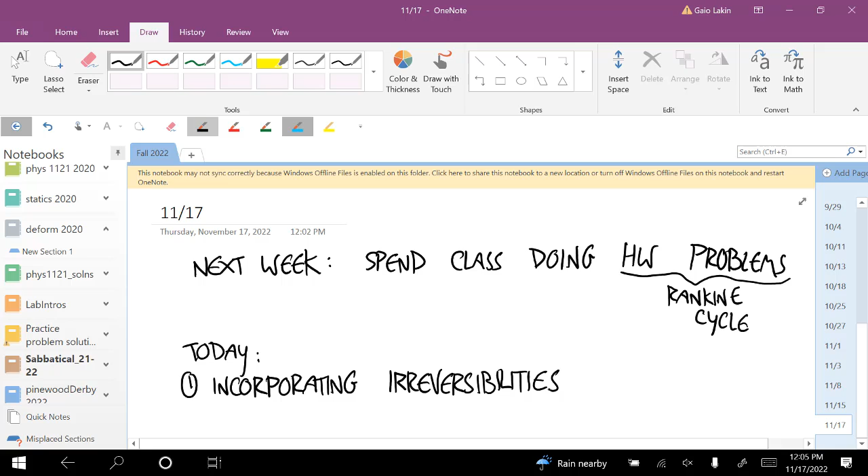Okay, so today we're going to talk about incorporating irreversibilities into the calculation, and then incorporating superheat and reheat. So the first one of these irreversibilities is just a way of getting more accurate, more realistic answers. And the second one is about power plant design, a couple of things that make power plants run more efficiently.

Okay, so first, irreversibilities. The two isentropic processes in the ideal cycle produce entropy in real life.

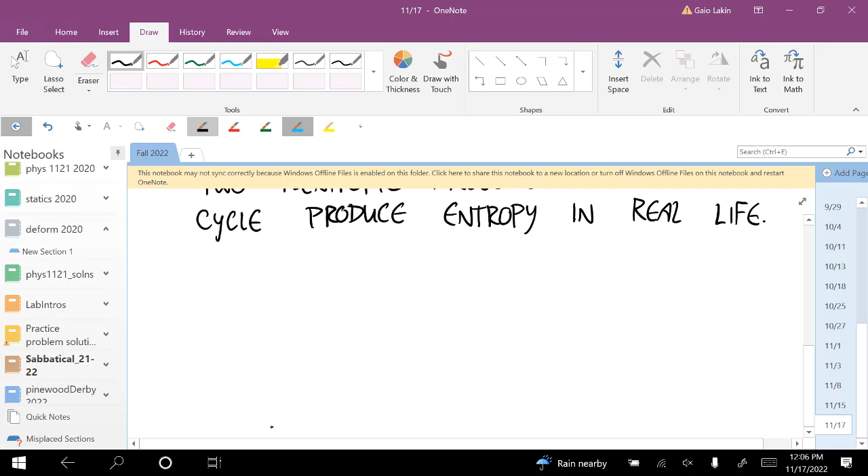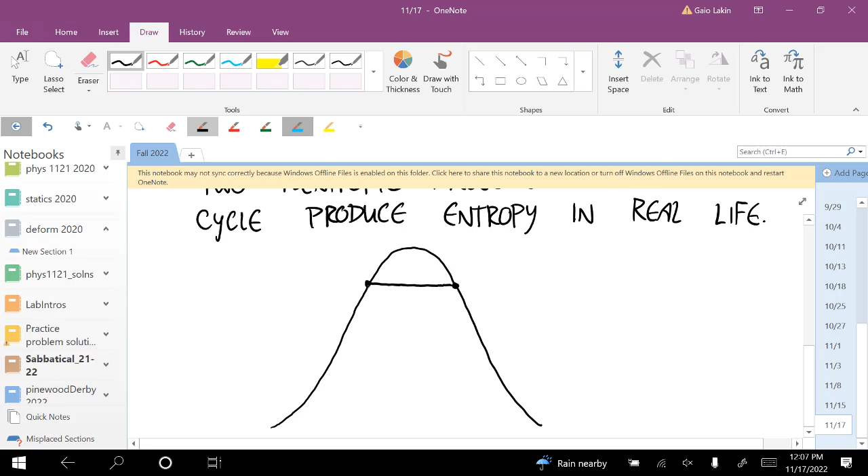So this is kind of what we're looking at. Here's a T-S diagram. So the ideal cycle that we've been dealing with looks like this. We have state 1 up here, and then it goes through the isentropic turbine. And then it goes through the condenser to state 3 - I'm leaving off state 2 for a second, I'll deal with that in a second. And then it goes through the isentropic pump - I'm going to leave that off for a second too. Okay, so that's the ideal cycle, that's what we've been doing so far.

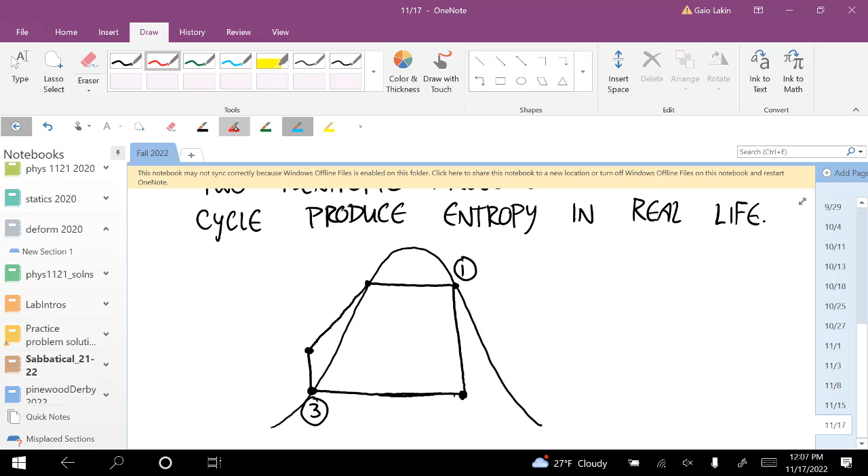In real life, what happens is this turbine process actually looks like this on the diagram. So this is state 2. You can see there's a small increase in entropy as you go through that turbine. What was our state 2 in the ideal cycle, now we're going to call it state 2s, for constant entropy.

And going through the pump, that's the other process we've been assuming is isentropic. Instead of that being an isentropic process like this, it produces again a little bit of entropy, so this is the true state 4. This black one that's been our state 4 up until now, I'm going to call state 4s. So you can see where that entropy comes into those two processes, because the horizontal axis is entropy, so you can see that each of those two processes increases entropy a little bit.

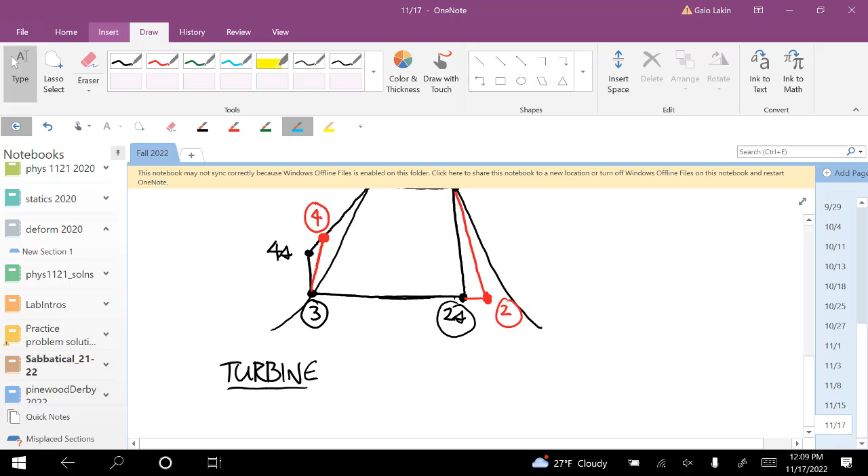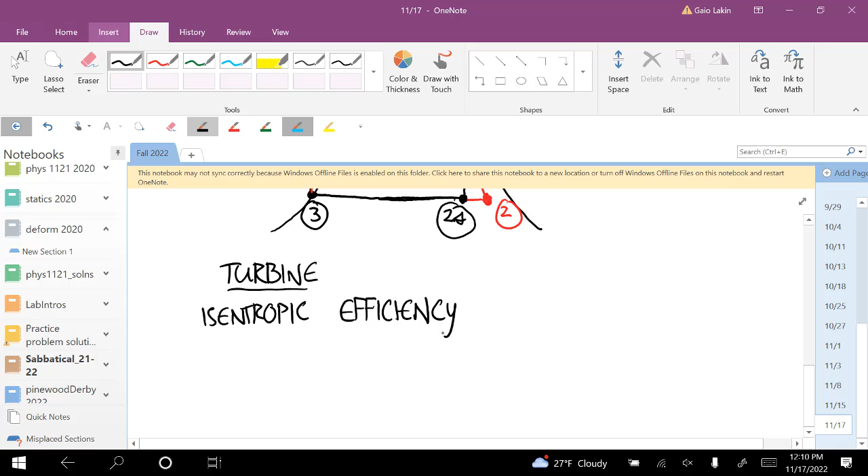And the way this is represented mathematically is called isentropic efficiency. So I'm going to go through the turbine first and then go through the pump. For the turbine, the isentropic efficiency, I'm going to call it eta sub t, and it's equal to the work rate for the turbine divided by the work rate for the turbine assuming isentropic. Which, of course, we've used this mathematical trick a lot since we've represented everything in terms of the work rate per mass flow rate. You can also write this as the ratio of the work rates per mass flow rate for these two things.

And now we have expressions for both of these two. So we can write this as the enthalpy at state 1 minus enthalpy at state 2, divided by enthalpy at state 1 minus enthalpy at state 2s.

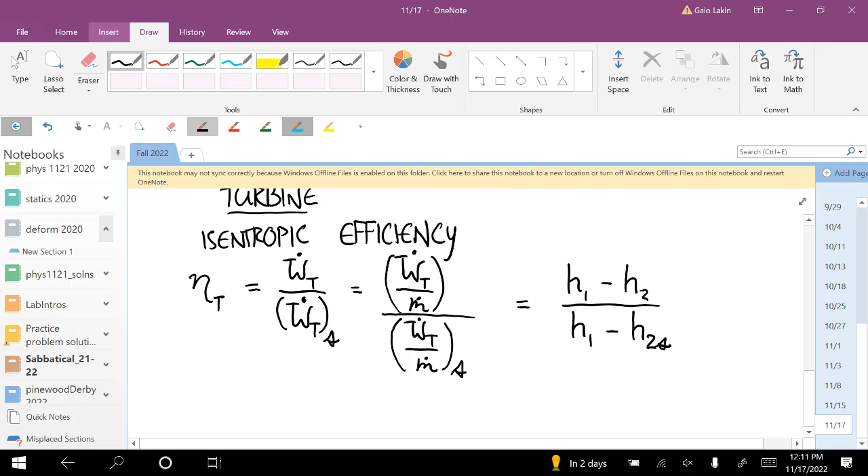So if you're given a fraction or percentage of that isentropic efficiency, you can rewrite this equation as H2: the true H2 is equal to H1 plus the isentropic efficiency times the quantity H2s minus H1.

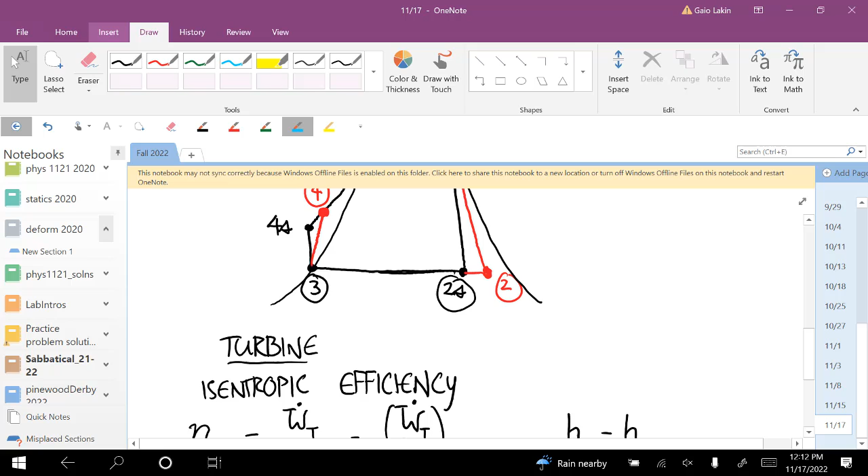So the idea here is, say you're given that this turbine has an isentropic efficiency of 90%. You can do the calculations for the ideal Rankine cycle, then do this correction to find the enthalpy at state 2. That enthalpy is what you'd use to calculate the thermal efficiency of the whole cycle.

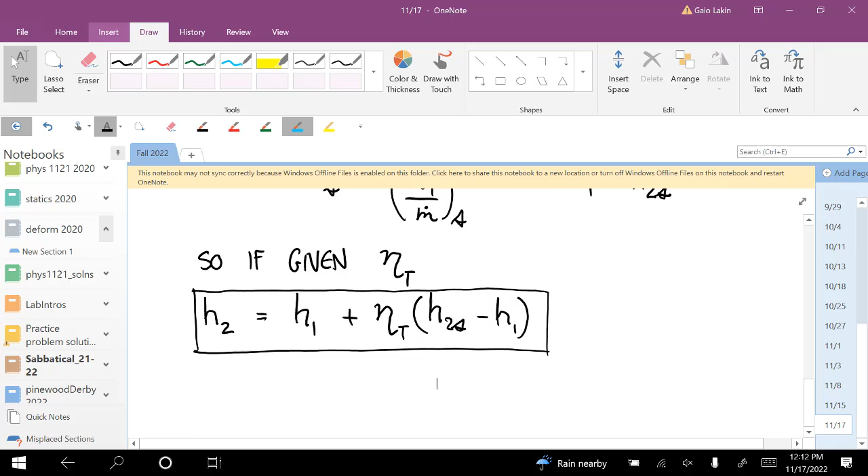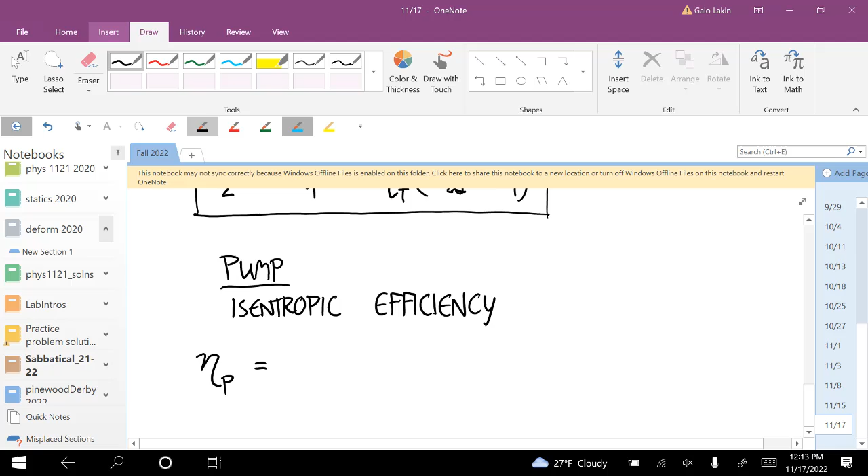And it's similar for the pump, so the isentropic efficiency of the pump, eta sub p. Notice this is fundamentally different than the turbine, because turbine work is what we're getting out, pump work is what we're putting in, and so that reciprocalizes the fraction for the efficiency.

So we have W dot for the pump, for the ideal case, divided by W dot for the pump in the true case. That's switched from what it was before. And you can write these as ratios of the mass flow rate.

Now that we have it this way, we can write it in terms of the enthalpies. So you have H4 for the ideal case minus H3, divided by H4 actual minus H3.

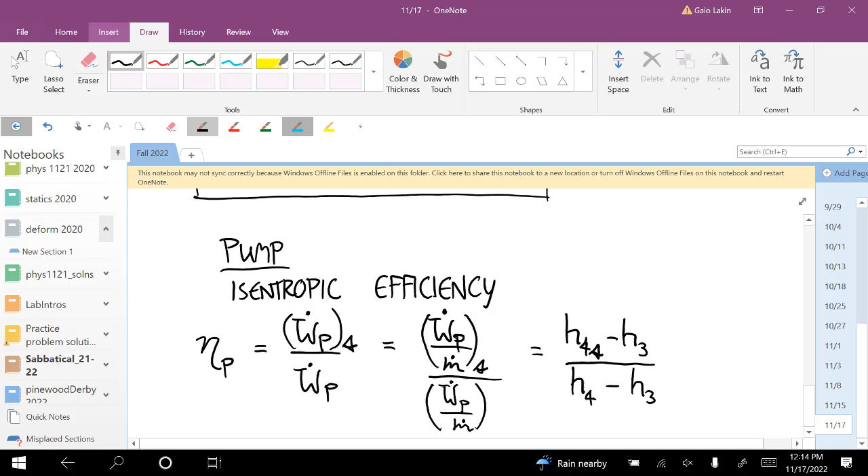One other thing: remember we can also write these for the pump because we're assuming this is liquid and incompressible. We can write this as V3 times the quantity P4S minus P3 — that's the other way to calculate that rate — divided by, well, the V3s are the same, real and ideal, so V3 divided by V3 times the quantity P4 actual minus P3.

Those V's cancel, so you can also write this isentropic efficiency as the ratio of P4S minus P3 divided by P4 minus P3. The S's are the ideal case, what we've dealt with up until now, and the non-S's are the actual case with entropy in these processes.

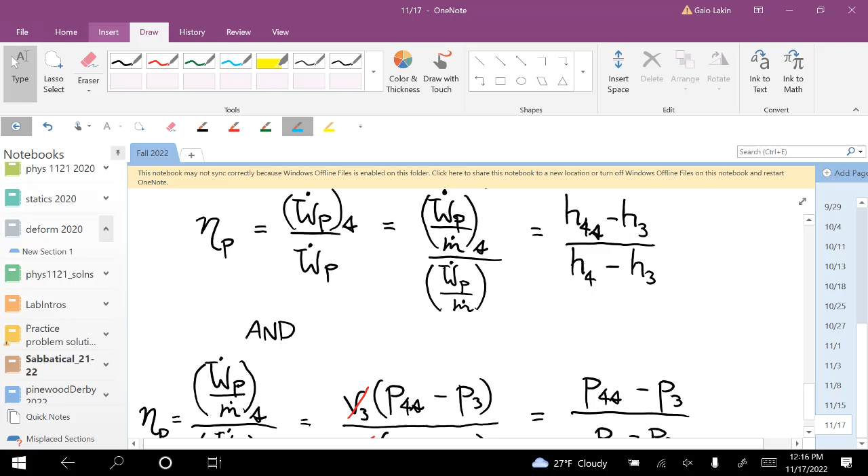So now we can rearrange, just like we did with the turbine, to find the new true states at state 4.

So if you know eta for the pump, then you can calculate H4 is equal to 1 over eta pump times the quantity H4S minus H3, plus H3.

Or alternatively, using that incompressible assumption, P4 is equal to 1 over eta P times the quantity P4S minus P3, plus P3.

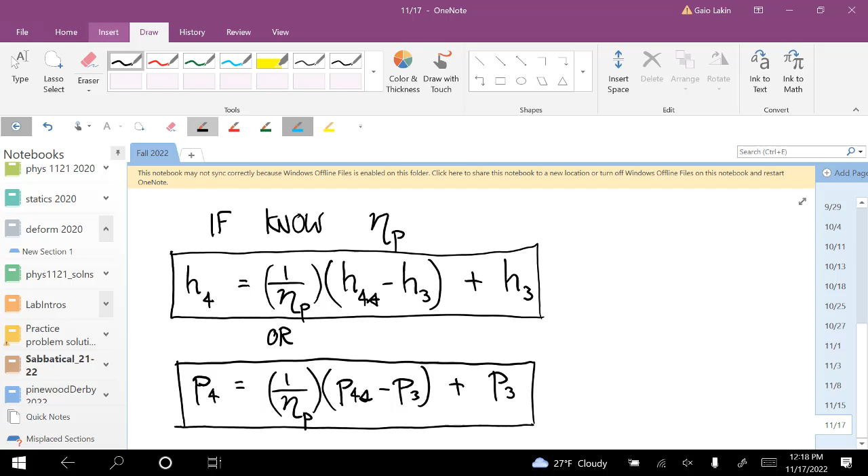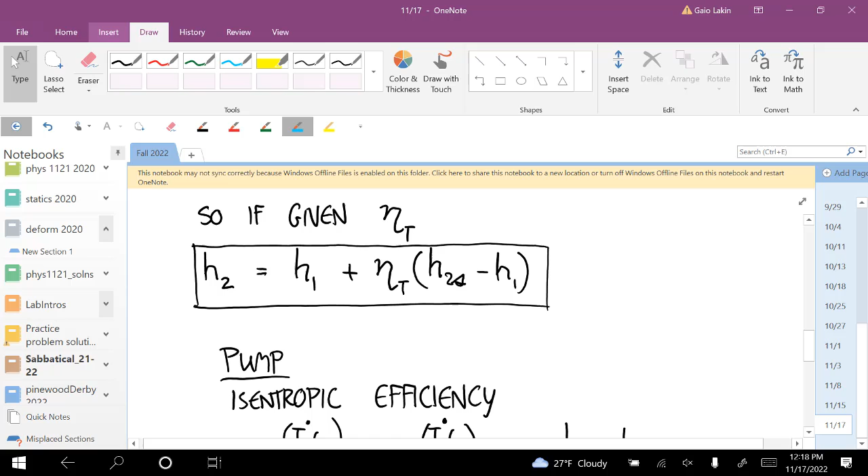So the basic idea is, if somebody has measured those isentropic efficiencies, you can do all your calculations for the ideal case like we've already done, then apply these correction equations to find the true states after the pump and the turbine, and plug those into the total efficiency equations.

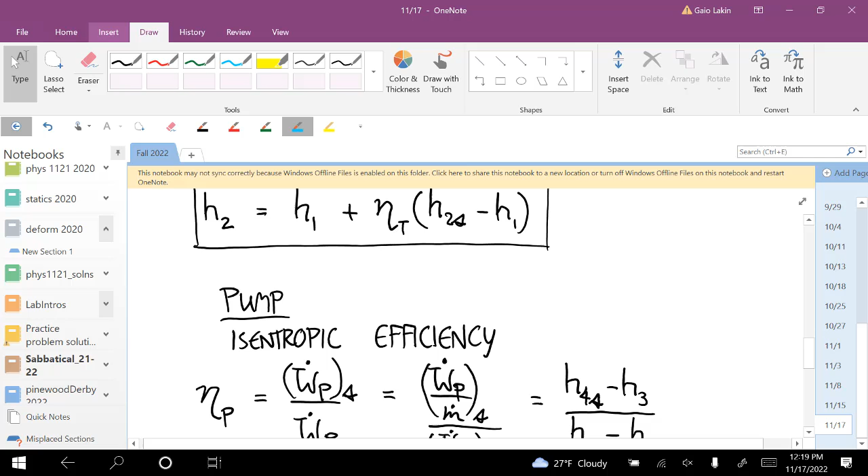So let's go back now to this same example from last time. Remember that last time we assumed this was an ideal cycle, so all our answers were for an ideal cycle. I'm going to use the calculations we did last time to be now our S states — you with me on that? Because we were doing the ideal case.

So now that's our 2S and our 4S. State 2 from Tuesday is now our state 2S, and our state 4 from Tuesday is now our state 4S.

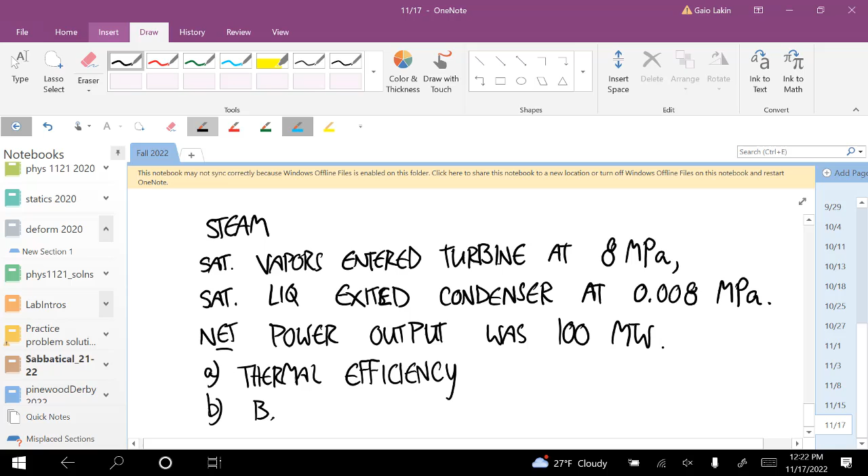And we calculated the thermal efficiency, the back work ratio, the mass flow rate, the rate of heat transfer in at the boiler, and the rate of heat transfer out at the condenser. Then we did the thing with the cooling water — I'm not going to do that again because the condenser isn't affected by this at all. This only deals with the two isentropic processes.

So calculate these again, assuming isentropic efficiencies at the turbine and the pump that are the same and equal to 0.85.

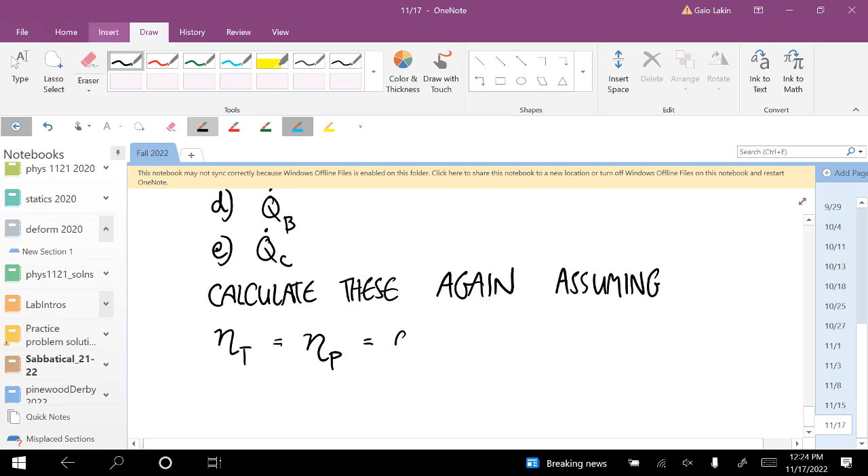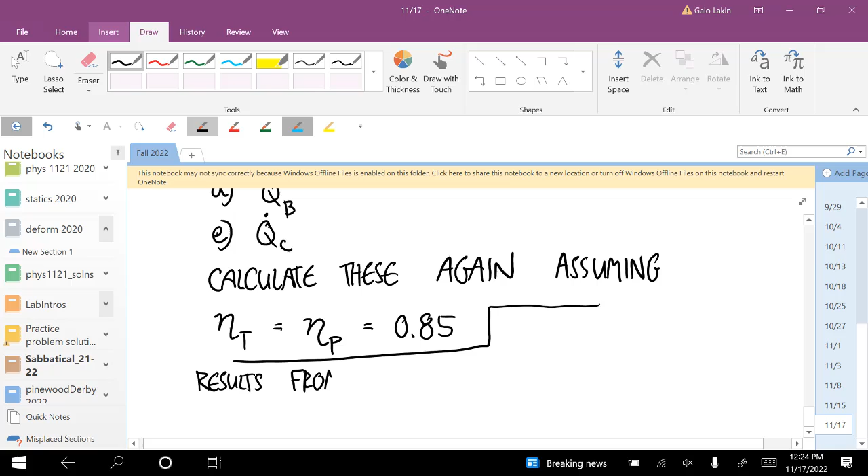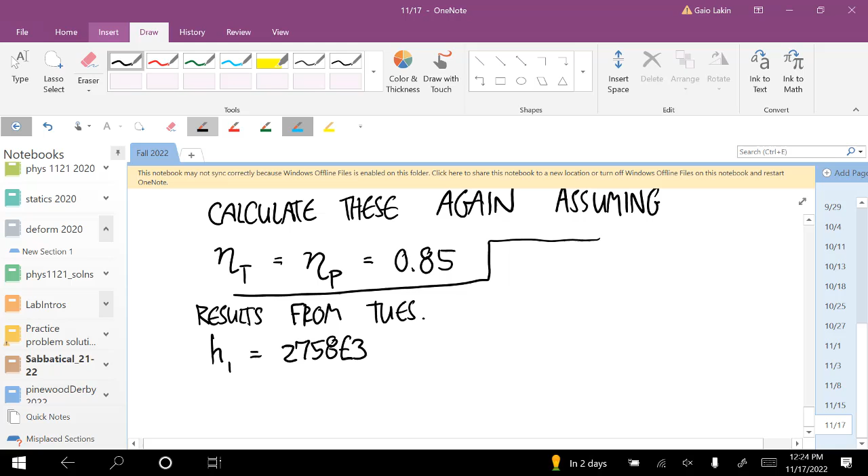Okay, when we did this problem before, we got — let me summarize our results from Tuesday. The enthalpy at state 1 was 2758 times 10 to the third. The enthalpy at state 2 that we found, now our 2s, is 1795 times 10 to the third.

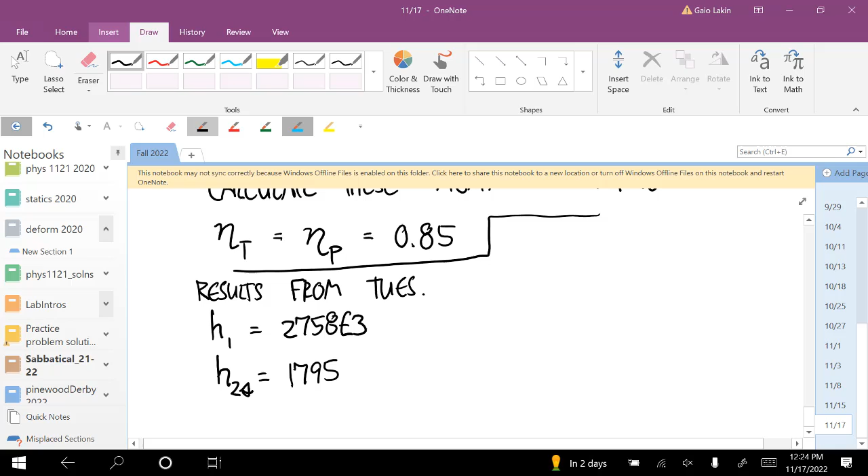H3 coming out of the condenser was 173.88 times 10 to the third. And H4, now our 4s, was 181.87 times 10 to the third.

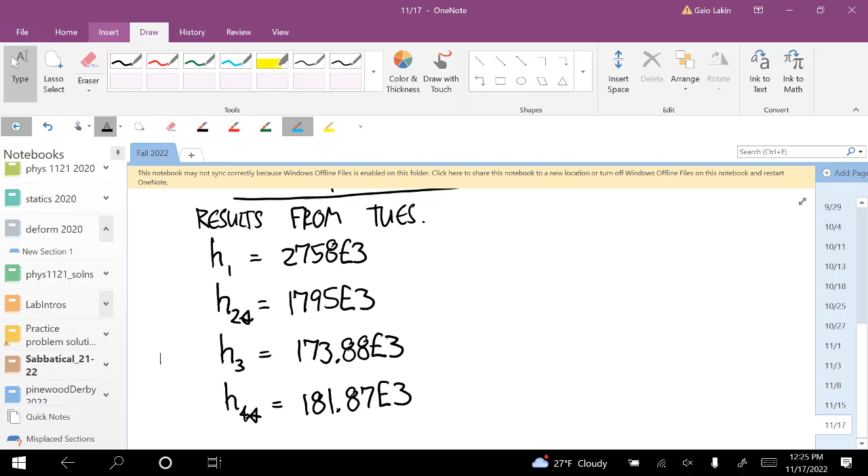And what we got — this is now what we're going to compare. We calculated — oh, did I not write these down? Any of you have your notes from last time? I guess I have mine right here. Let's see, so what we got was — oh, I do have it, right here. So what we got last time was a thermal efficiency — is that what it was? 0.371, yeah.

So we got a thermal efficiency of 0.371. We got a back work ratio of, what was that? 8.31 times 10 to the minus third.

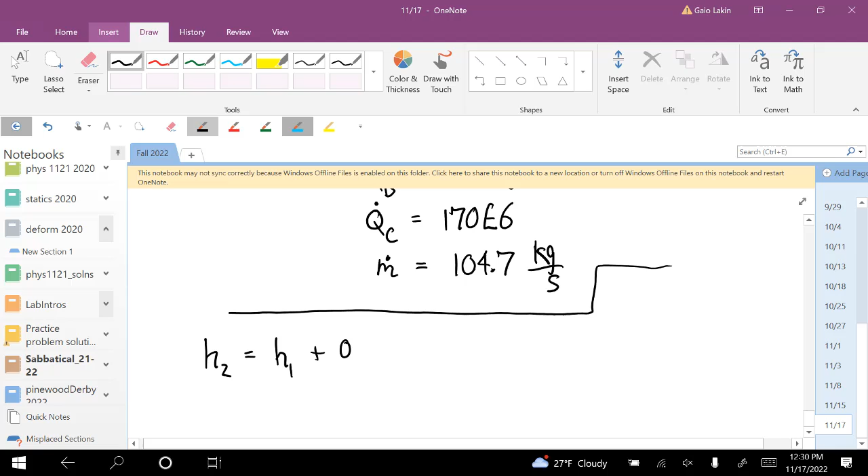Okay, so first we can calculate H2. So H2 is equal to H1 plus 0.85 times the quantity H2S minus H1. And so that's equal to 2758 times 10 to the third plus 0.85 times the quantity 1795 times 10 to the third minus 2758 times 10 to the third. And you get an H2...

I got 1939.45 times 10 to the third. Is that what you got? Yeah.

And we can do the same thing for H4. So H4 is H3 plus 1 over 0.85 times the quantity H4S minus H3. And so H4 is 173.88 plus 1 over 0.85 times the quantity 181.87 times 10 to the third minus 173.88 times 10 to the third.

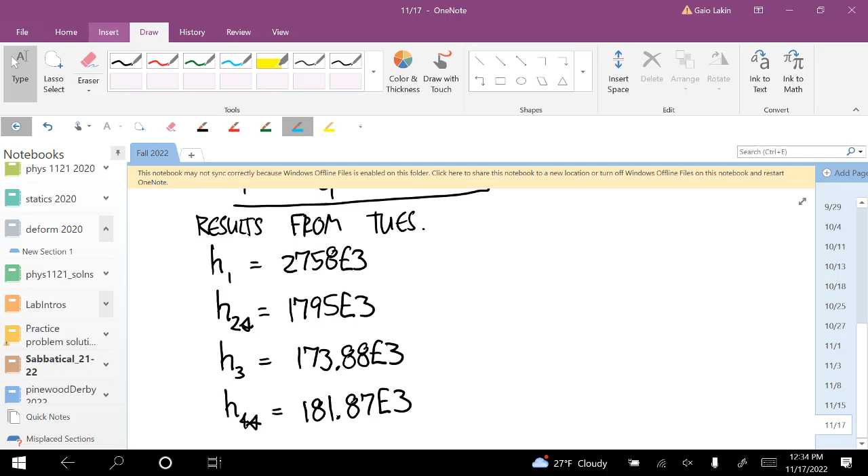So that's 1 minus 1939.45 - I'm going to leave off the 10 to the thirds because it's just a ratio here - minus H3, 173.88, divided by 2758 minus 183.28. And you get 0.314.

So you start with the same boiler temperatures and everything. The condenser and boiler work exactly the same as they did before, but you have those efficiency losses in the pump and the turbine, and it decreases your thermal efficiency from 0.37 to 0.31.

Wait, just to reiterate then, so the eta P and eta T are just referring to the processes done by the pump and the turbine, and then this eta is the entire cycle? This eta is the entire cycle, yep. And the other two are just for the two isentropic parts, which is the turbine and the pump. Yeah, which, well, were isentropic, but in this case. Correct. Oh, yes, right.

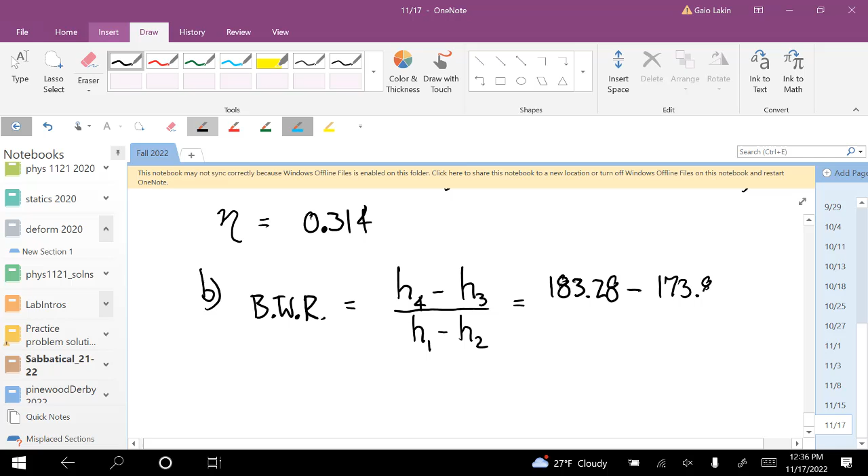And so that's 183.28 minus 173.88 divided by 2758 minus our new H2, which is 1939.45. And so the back work ratio is 1.15 times 10 to the minus second.

So these first two went the way we all expected them to. You have less efficiency, so you have less total thermal efficiency, and the pump is using up more of the power, a bigger chunk of the power than you were before, of the power that you get out of the turbine.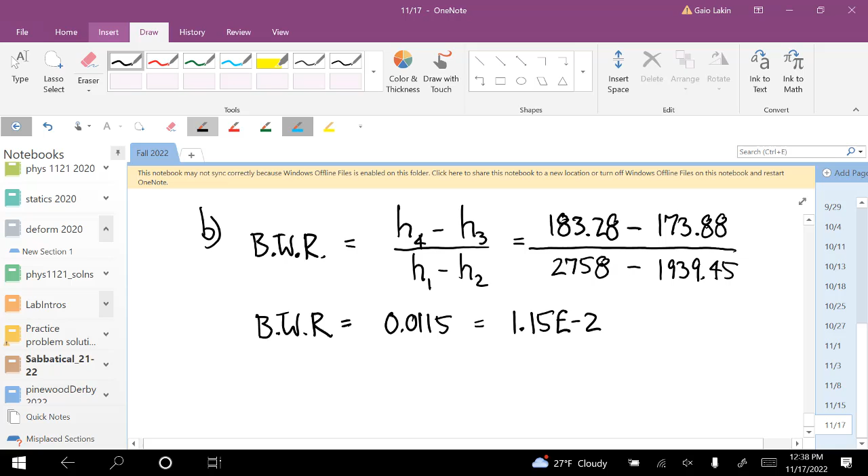Mass flow rate. Well, we know that 100 times 10 to the 6 is the work rate at the turbine minus the work rate at the pump. And so that's equal to the mass flow rate times the quantity H1 minus H2, because that's the rate of work produced at the turbine divided by the mass flow rate, and then minus the expression for the pump, so minus H4 plus H3.

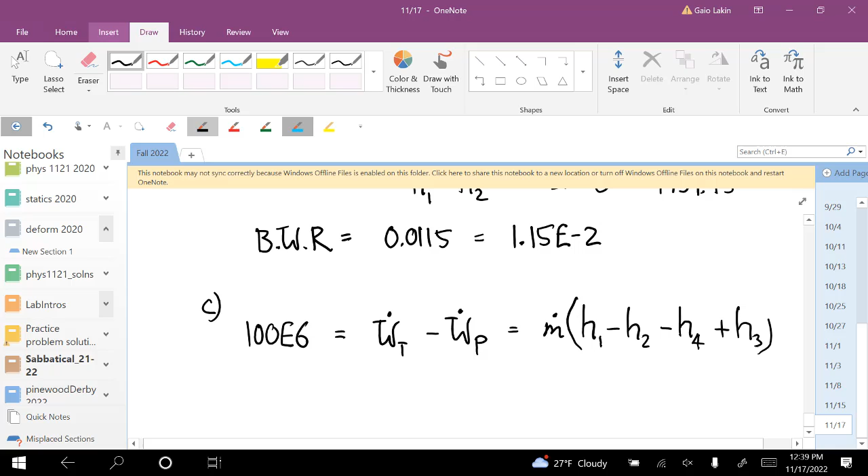So the mass flow rate is 100 times 10 to the 6, divided by the quantity H1 minus H2 minus H4. So 2758 times 10 to the third, minus 1939, minus 183, plus H3, 174. Oh, and these are all times 10 to the third. And so the mass flow rate is 123.5, about kilograms per second.

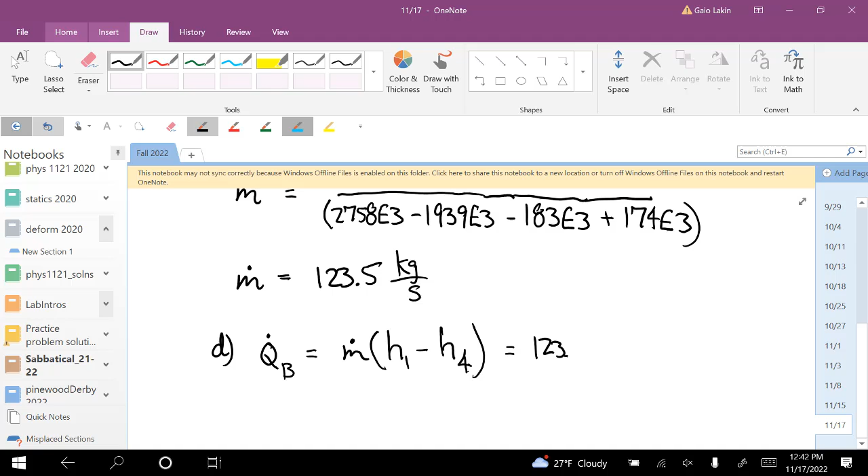And then, well, now these last two are pretty quick. The heat coming in at the boiler is the mass flow rate times the quantity H1 minus H4. So that's 123.5 times the quantity 2758 times 10 to the third, minus 183 times 10 to the third, and we get 318 megawatts. For the ideal case, we had 270. So you need more heat coming in at the boiler.

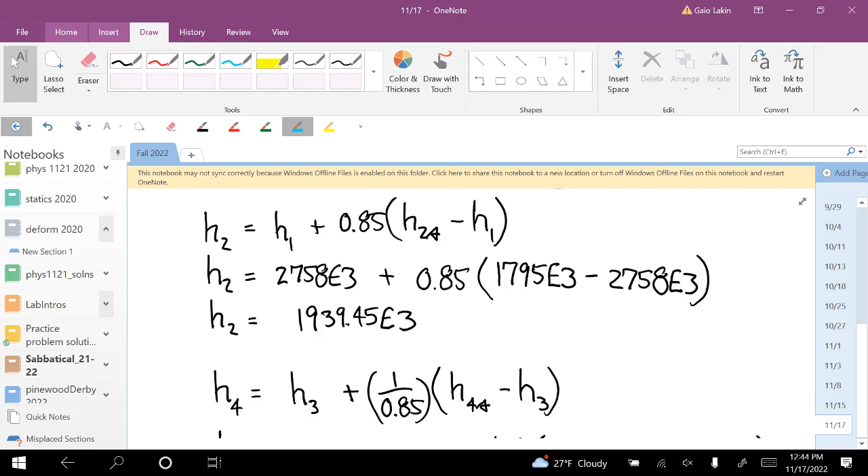And then at the condenser, the last one, the heat out at the condenser is equal to the mass flow rate times the quantity H2 minus H3. So that's 123.5 times 1939 times 10 to the third, minus 174 times 10 to the third, and we get 218 megawatts.

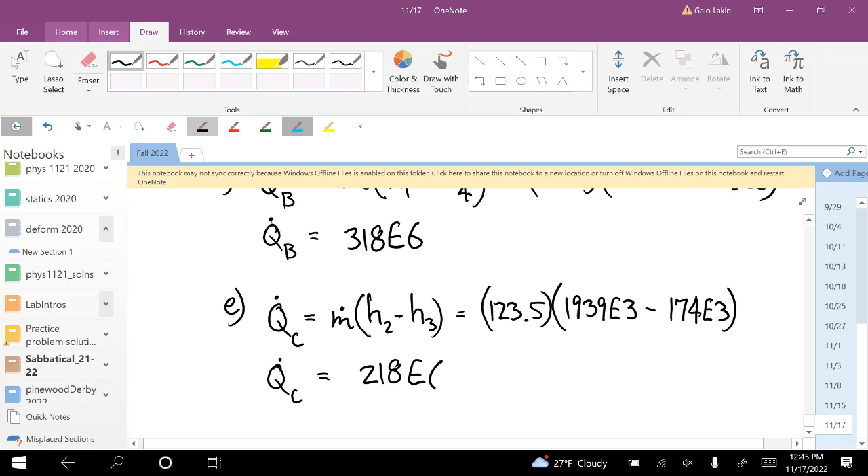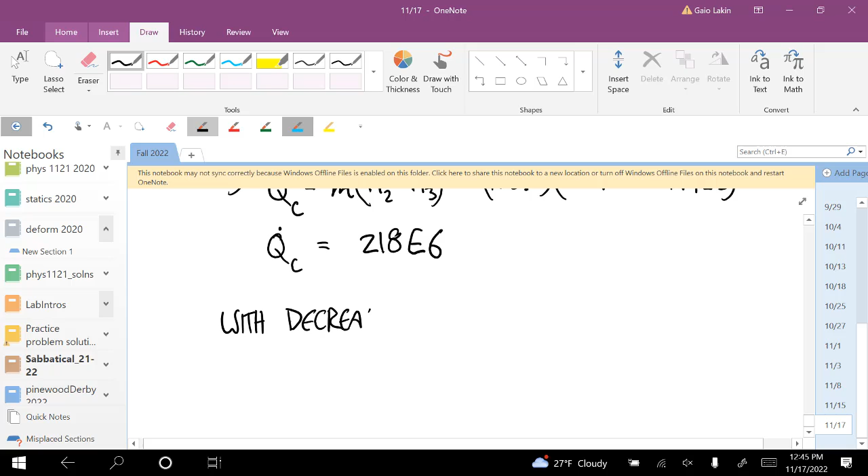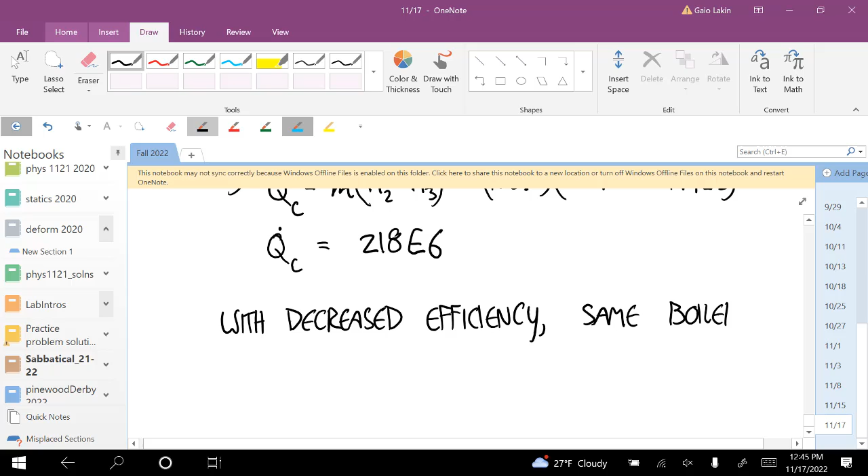Okay, so with decreased efficiency, and with the same boiler and condenser states, for the same net power, our thermal efficiency was down, our back work ratio was up. What was the next thing we calculated? Mass flow rate. Our mass flow rate was up. Our heat rate coming in at the boiler was up. And our heat out rate at the condenser was up.

Any questions about doing those? Are you concerned at all with the heat or mass flow rate of the condenser for the other liquid going through, the cooling liquid?

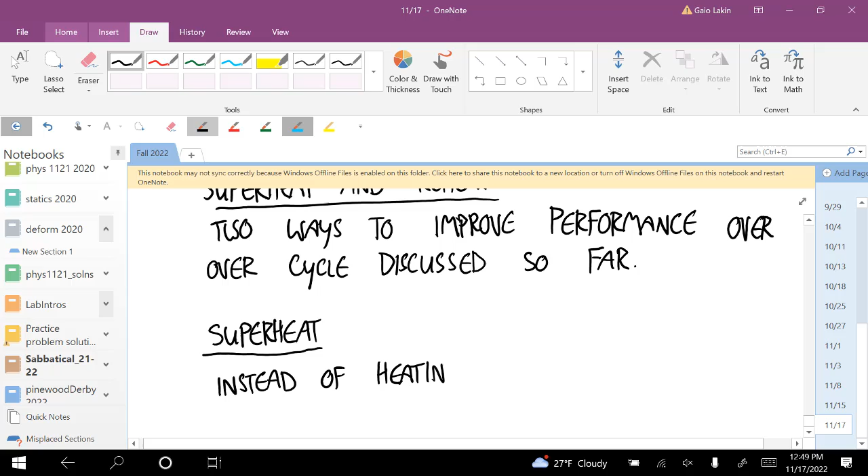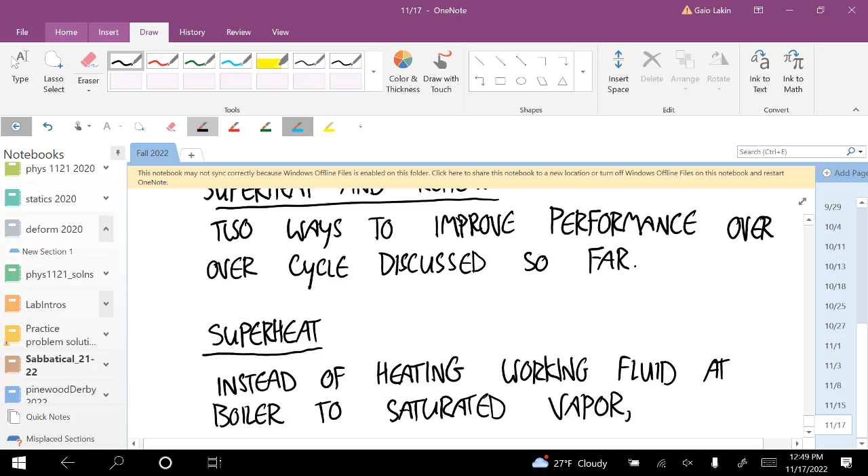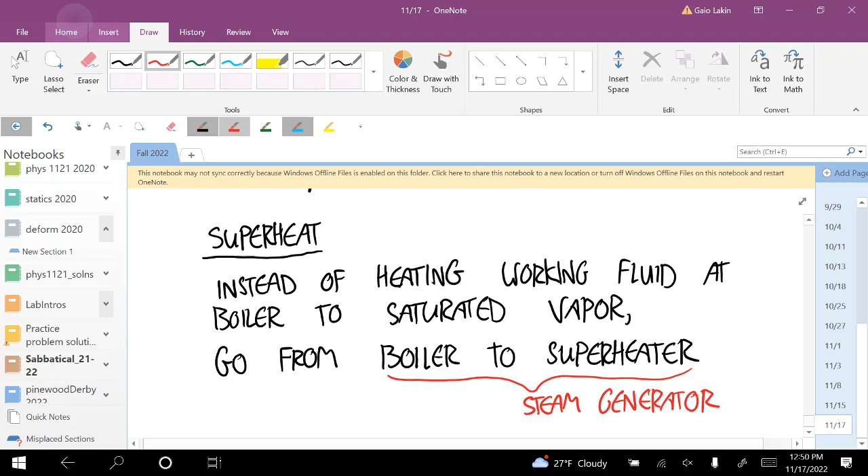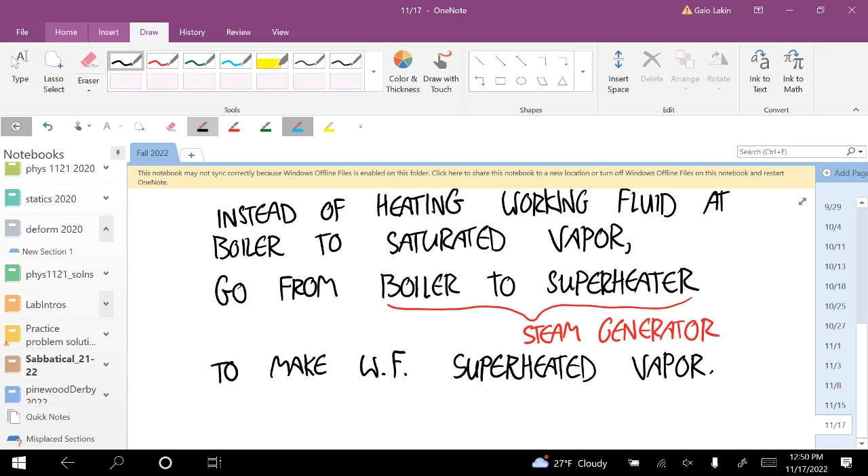Okay, so let's start with superheating. So the idea of superheating is, instead of heating the working fluid at the boiler to a saturated vapor, you go from the boiler to a superheater, and this two-stage thing here is called a steam generator, to make the working fluid a superheated vapor. Well, you know that if this increases the average temperature of the boiler, which we already talked about, it improves the efficiency of the whole cycle. So this increases cycle efficiency.

So this is what it looks like. So in the cycle that we've talked about so far, this would be state one over on the right side. That would be a saturated vapor. But now from here, instead of going straight into the turbine, it's going to go through the superheater and increase past that saturation point. So state one is up here, and then it's going to drop down to state two, go through the turbine. Everything else stays the same.

So this is the condenser. It comes out of the condenser as a saturated liquid. Then it goes through the pump to state four. And then this sort of three-leg trip in the boiler means that it starts out as a compressed liquid. It gets heated up at a constant pressure until it's a saturated liquid, then it changes phase until it's a saturated vapor, and then it superheats to become a superheated vapor.

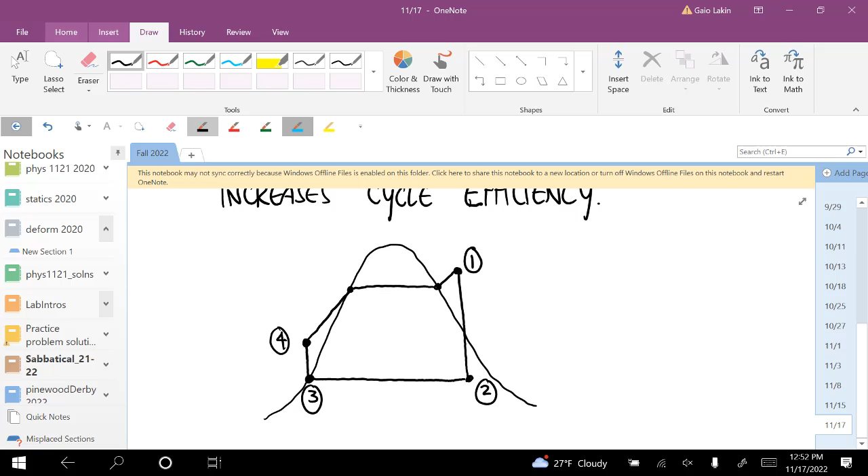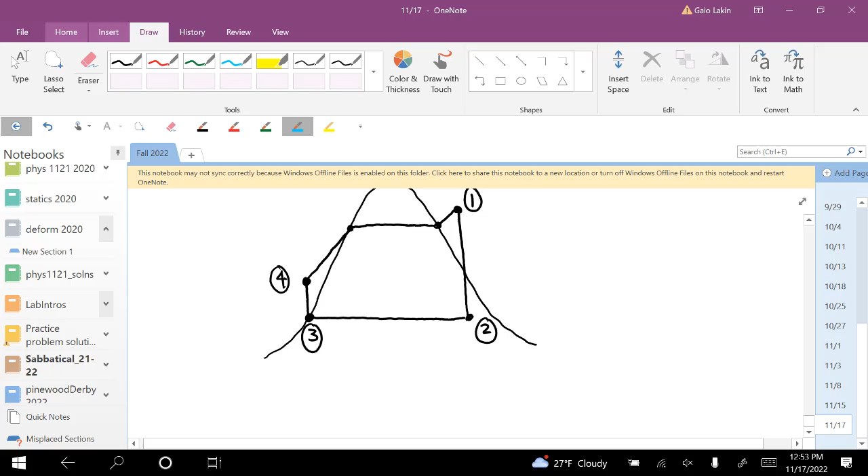And then this idea, you can combine it with reheating. Let me draw that, and then I'll explain the whole thing. So first, let me draw what's happening physically in the cycle if you have a reheat. So this is the steam generator. We're going to use superheated vapor again. And the steam generator sends this superheated vapor through the first stage of a two-stage turbine.

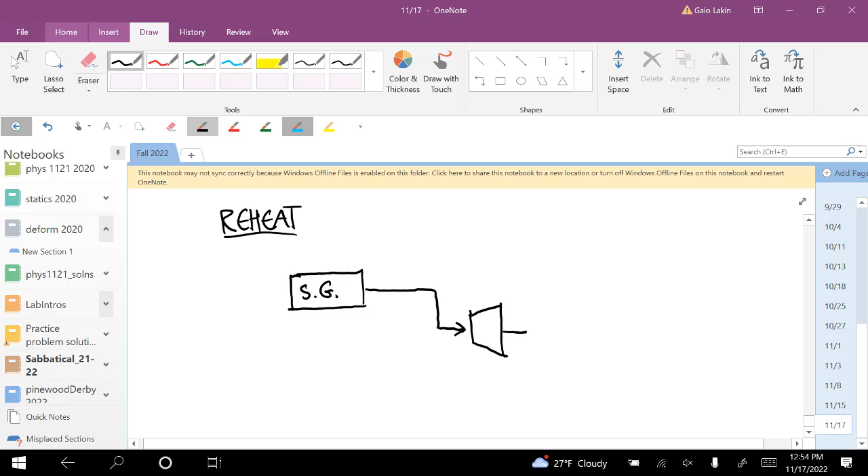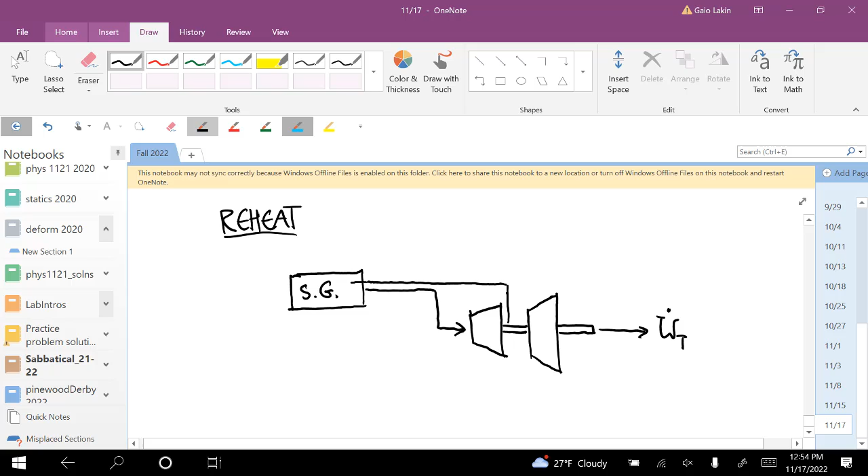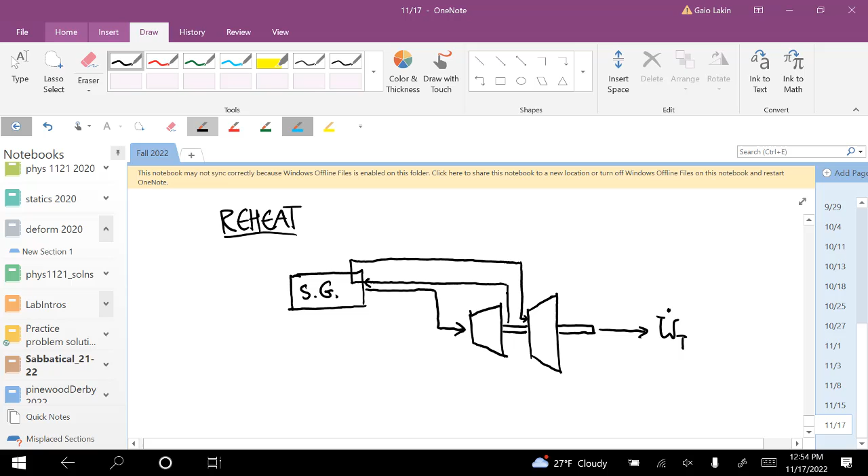Okay, so this is where the work is coming out. As the working fluid comes through the first stage turbine, it goes back to the steam generator, gets heated up again, and then gets sent back to the lower pressure second stage turbine. Through that second stage turbine, now everything looks the same as we're used to. It goes through the condenser—I guess I usually put that on the bottom—and then through the pump and back to the steam generator.

The working fluid in that first stage turbine has a high pressure. The one in the second stage turbine has a lower pressure.

The benefit of this is, we talked about how increasing the pressure in the boiler increases the overall efficiency of the power cycle, right? But there's a practical problem with high pressure coming into the turbine: when the pressure is really high, what happens to the boiling point of water? Does it go up or down? No, it goes up. If the pressure goes up, the boiling temperature goes up. Like if you're climbing Mount Everest, you can't make pasta because it boils at 70 degrees or whatever.

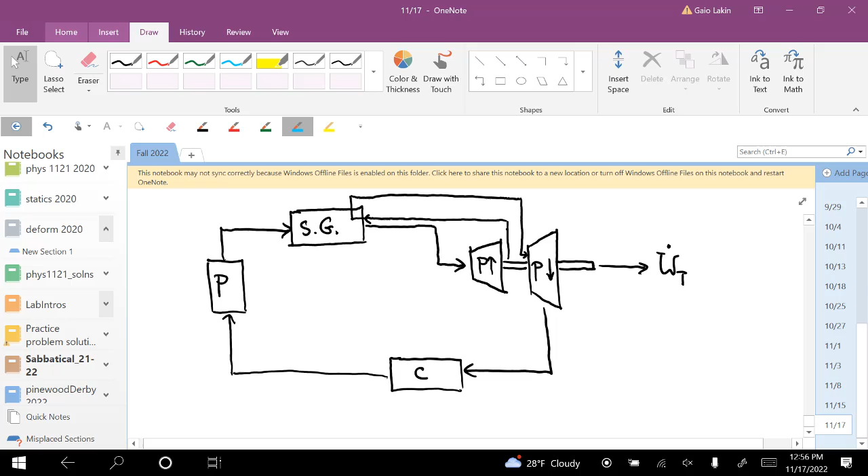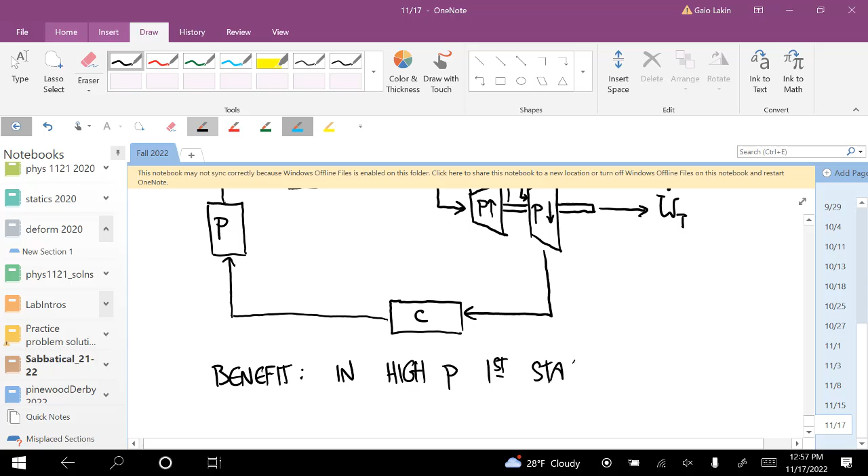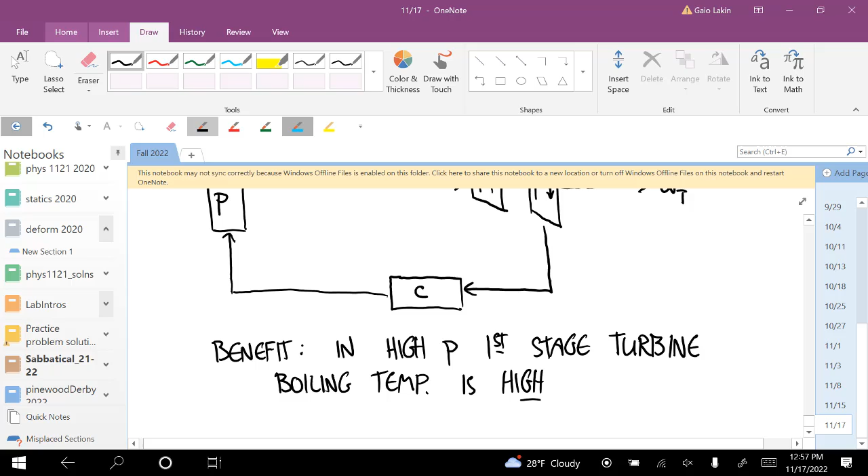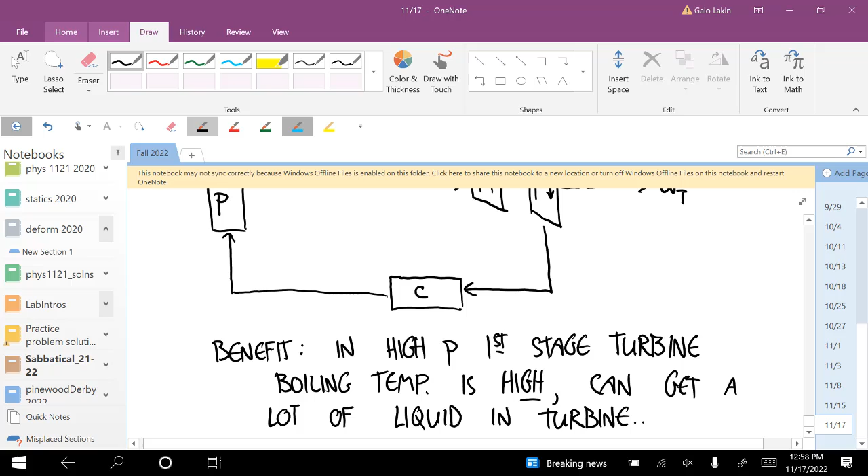So the idea is the benefit of this is in the high pressure first stage turbine: the boiling temperature is really high. And that means that you're likely to have liquid, get back to the saturation temperature, and have a mixture of liquid and vapor in the turbine. That's not thermodynamically bad, but it's bad for your turbine. You can get a lot of liquid in the turbine, which is bad for the blades. So by reheating this vapor, you can keep that from happening and save maintenance on the turbine.

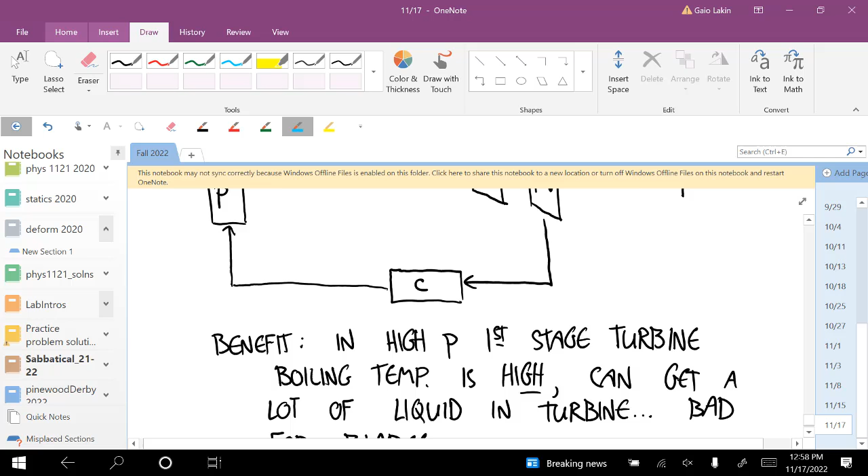Okay, so here's what this looks like on a TS diagram. Wait, so real quick, the stuff going back in to get superheated, since you have a vapor liquid mix, is it going to be mostly that liquid going back through to get superheated?

So ideally, I'm going to draw a picture right now, and let's talk about it as we look at the picture, because you can actually see what's going on. So here's the TS diagram. Here's the first superheating, I have to make this a little shorter. I'm going to call this state 1A. Now from 1A, it goes back into the steam generator. It can get back to saturation or stay a superheated vapor, but it gets here to what I'll call state 2A.

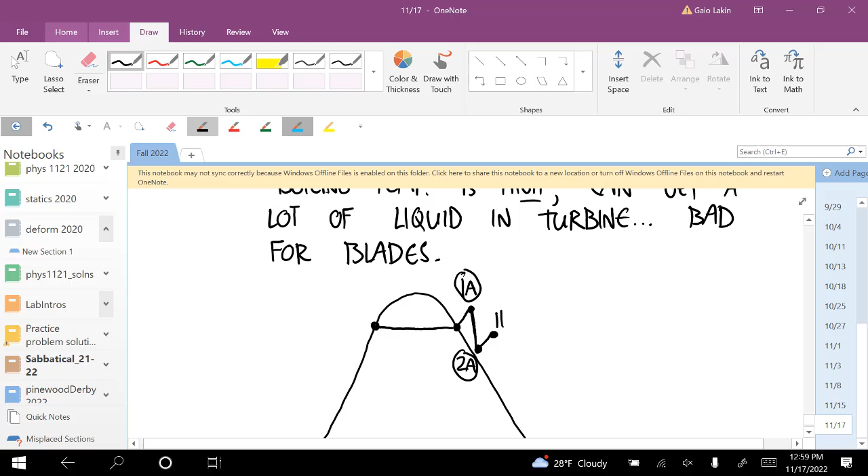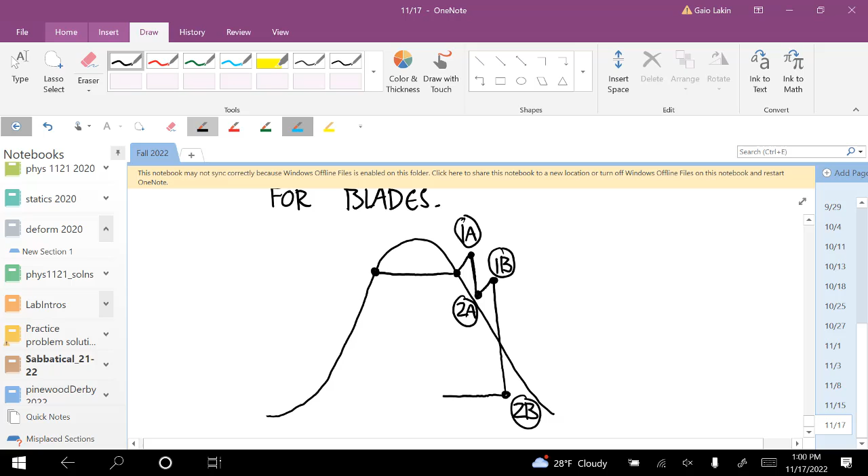Now it goes back to the steam generator and the temperature goes up again, I'll call that 1B. And now it goes through the second stage turbine and gets back past the saturation point, so this is state 2B. And now everything else stays the same. Here's state 3. Here's state 4.

And this state 2A can be in the mixed region, or it can be in the superheated vapor region. But either way, sending it back through that steam generator keeps the vapor in the turbine from going as far past the saturation point, so it keeps it from becoming liquid, or from becoming very much liquid.

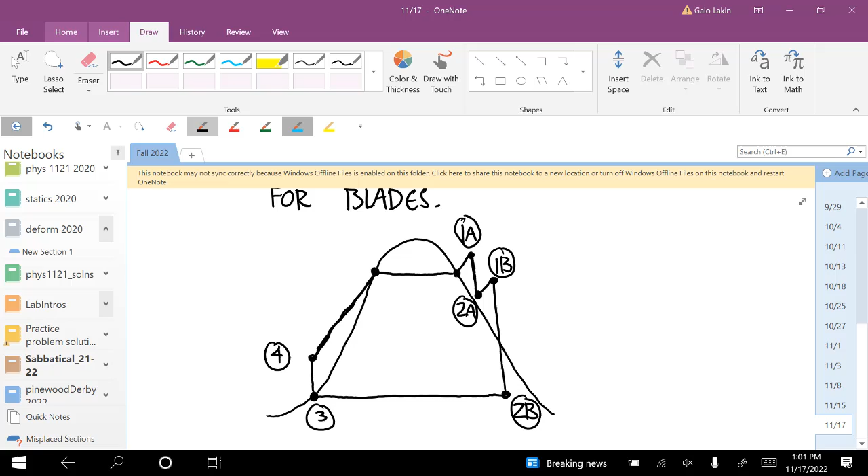Okay, so let's start at the boiler. It enters the boiler at state 4 as a compressed liquid, and it heats up until it's a saturated liquid here. Then it changes phase until it's a saturated vapor here. And then the superheater brings it past the saturated vapor into a superheated vapor. So now we're done with the steam generator, the whole steam generator, and we're at this point 1A, ready to go through that first high pressure turbine.

So now I've drawn it as isentropic again. It goes through that first high pressure turbine from 1A to 2A. And then from 2A to 1B it's heading back to the steam generator for the temperature to increase again, taking this other jog back farther into the superheated vapor region.

So going from 1A to 2A, you get work out of it from the turbine, right up to the point where it crosses the threshold where you're getting water again, and you then feed it back. Otherwise, with a single turbine, it would go straight from 1A downward, all the way to 2B, or just to the left of 2B, which would mean a greater water to vapor ratio in the turbine. Exactly, because the further right you are, the lower that ratio is. You want to move 2B to the right.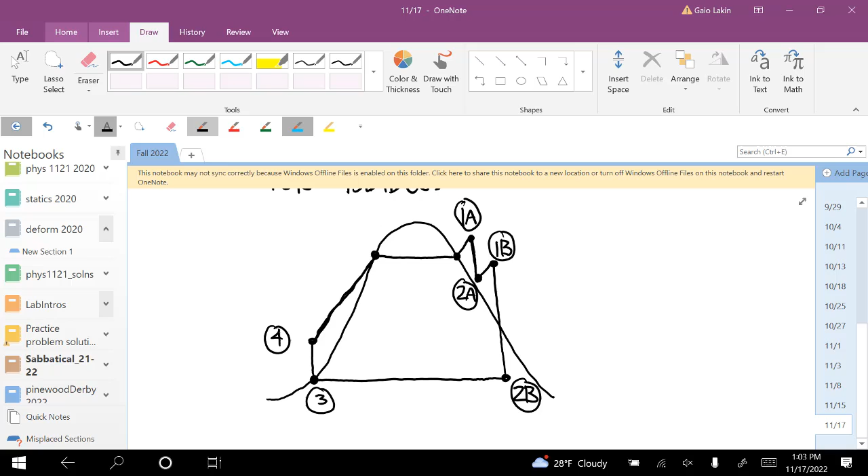Okay, so let me just write down the steps from the different states. So here's 1A, 2A, 1B, 2B, 3, and 4.

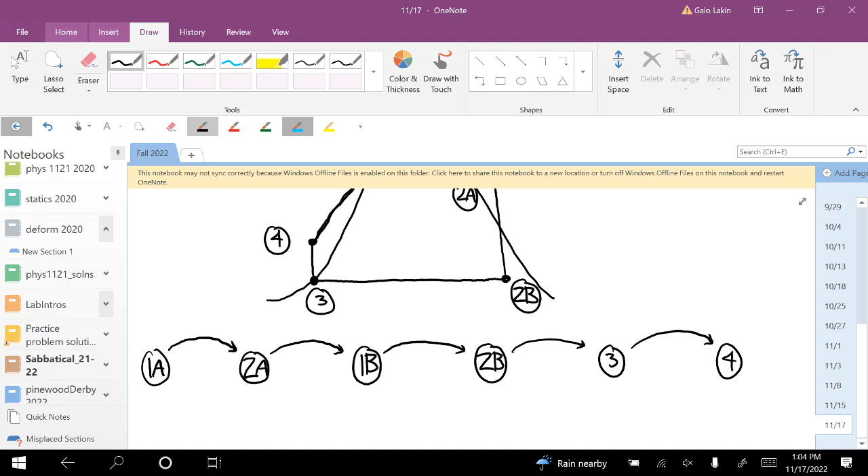And we'll talk about what we know at all of these things. So from 1A to 2A, that is the high pressure turbine. We're going to assume that that's isentropic, although you could make the corrections using the isentropic efficiency.

From 2A to 1B, it goes back through the steam generator. So that's a constant pressure through the steam generator.

From 1B to 2B, that is the low pressure isentropic turbine. From 2B to 3 is the condenser. I'll write constant pressure on that again. And then from 3 to 4 is the isentropic pump.

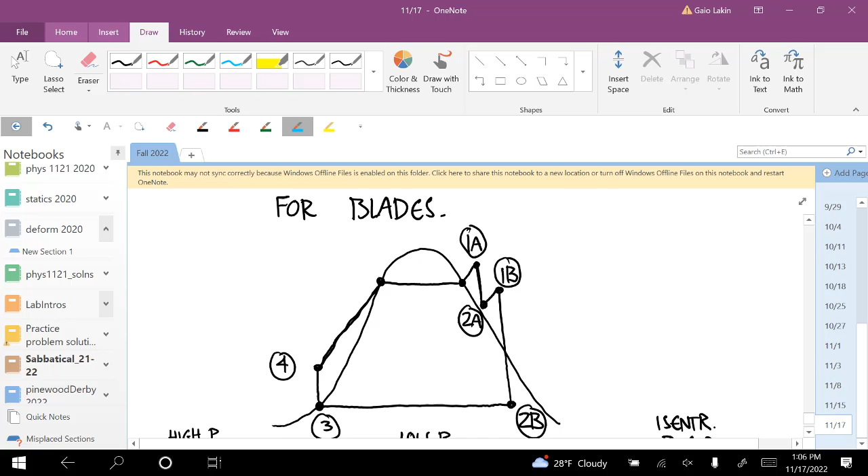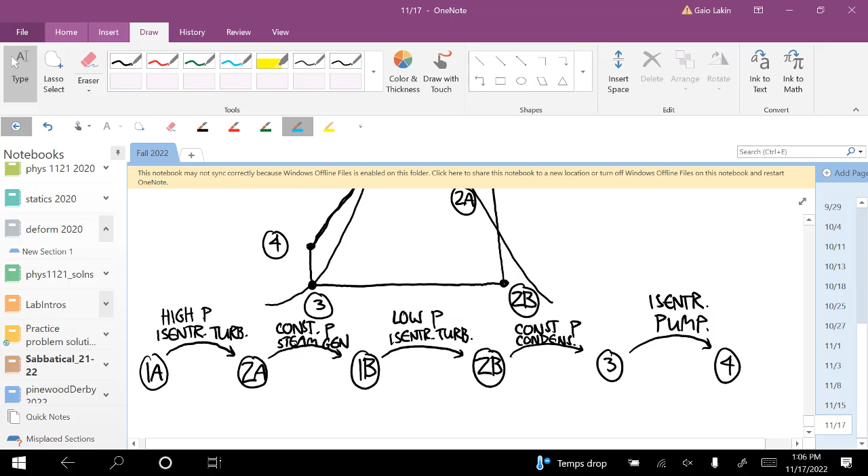So the next thing we're going to do, I'm going to wait until next class to do this problem, but we have one more sort of longish problem that's going to use similar parameters to those last two examples we did. And so we'll do this example problem.

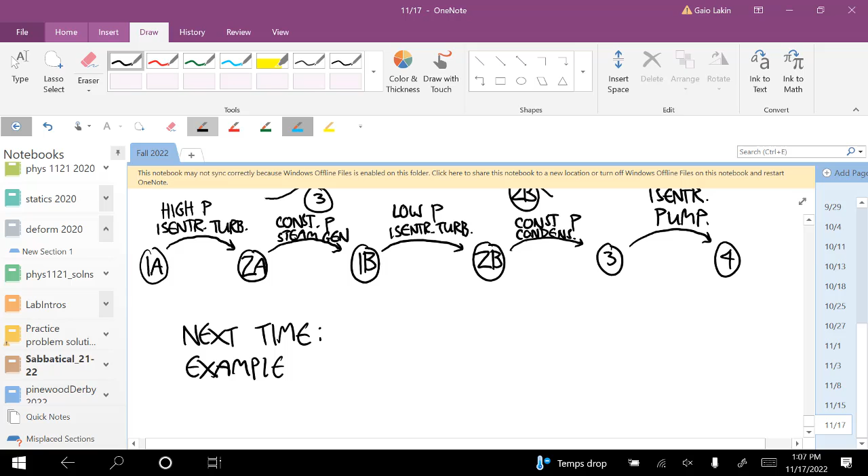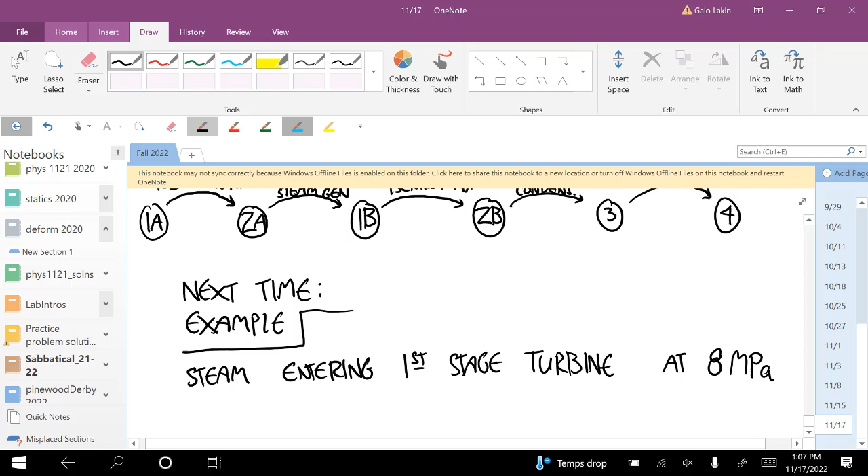So we're still going to have the steam entering the first stage turbine at 8 megapascals. This time, since it's not a saturated fluid, we have to know the temperature too in order to look stuff up. So we're told that the temperature is 480 Celsius.

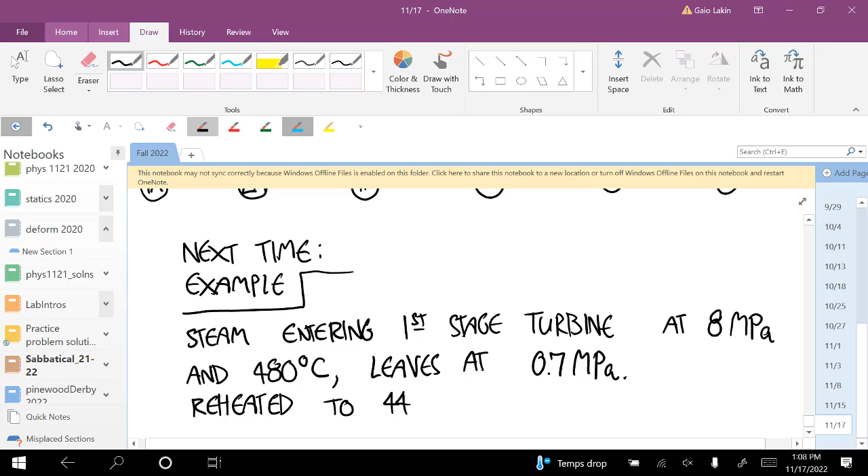And it leaves at 0.7 megapascals. It's reheated to 440 Celsius. And then goes through the second stage turbine.

And it exits the second stage turbine at the low pressure that we've had in those other example problems, 0.008 megapascals, lower than atmospheric pressure. Net power output is 100 megawatts again.

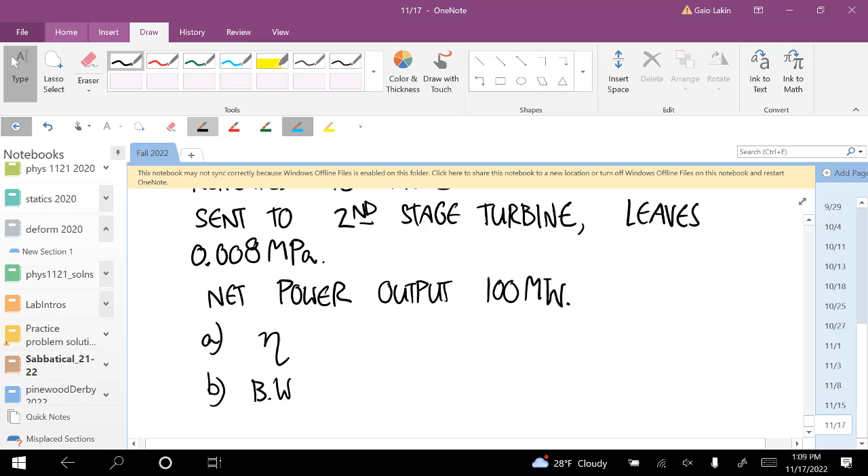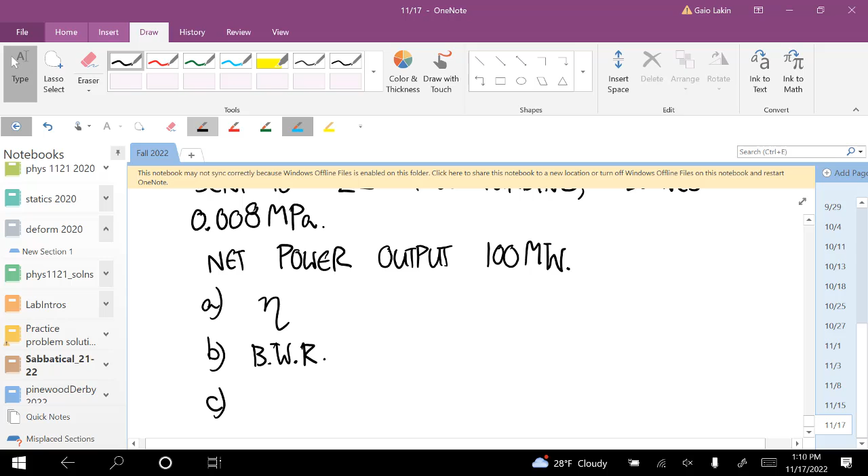And we're going to basically do all those same calculations again. We're going to calculate the thermal efficiency, the back work ratio... it doesn't have a back work ratio on there, but we could still calculate that. Then the mass flow rate, yeah. And then the heat transfers at the boiler and the condenser.

And hopefully we're going to see that the efficiency goes up again. The back work ratio goes down, and in order to produce that same amount of net power, we have less heat transfer at the boiler and less heat transfer at the condenser. So overall we'll see that this is better than the single stage turbine.

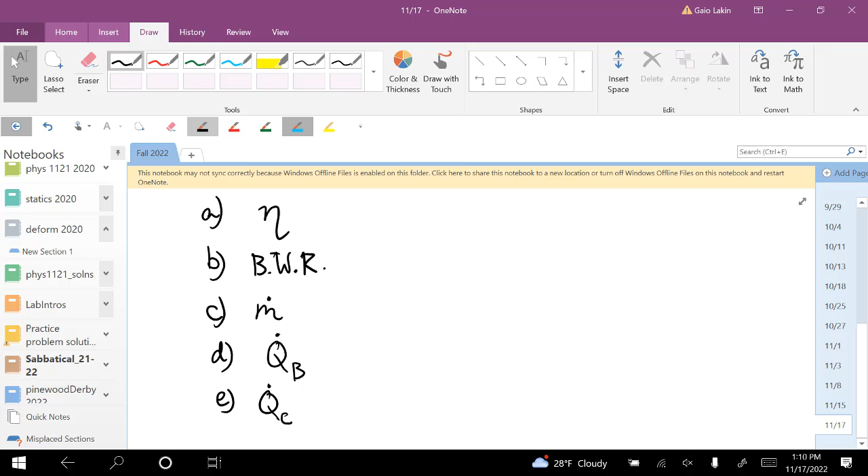Right, yeah. Can you go back up to the numbers, like 1A to 2A and 2A to 1B? Oh, yeah, I don't know why I wrote those so small, but...

So how is the reheat from 2A to 1B at constant pressure? Does it only go through saturation? Or is this some like magical balloon superheat system that doesn't increase the pressure?

So it's going back into... if you just have, if you have steam, oh, that's a good question. So if you have a fixed volume and you have steam and you send it back, you have steam and it fills the room and then you keep heating it up, that pressure is going to go up. I'll have to think about that later. Okay, that is a good question, though.

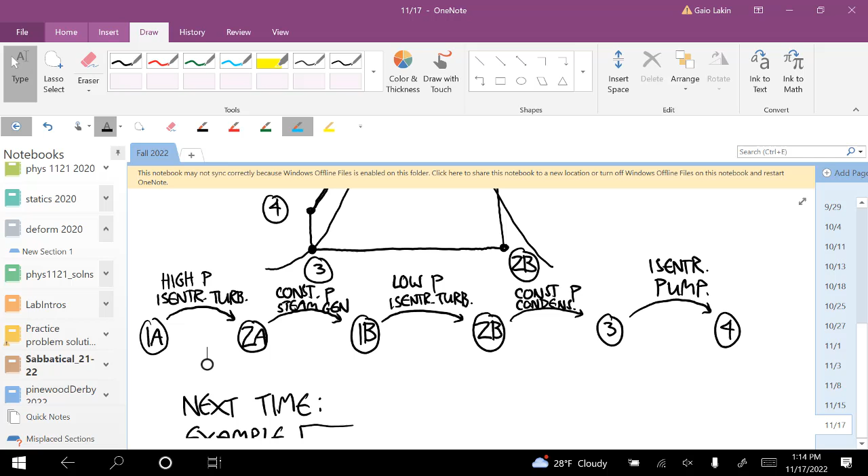Okay, that's all. No more questions.